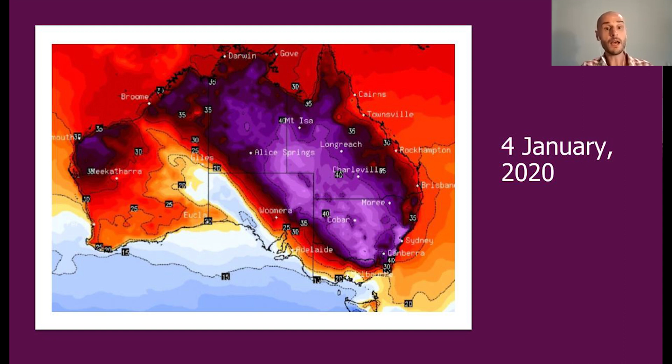There are so many different things that we can be doing around housing, but we know that improving the standard of our homes and having better energy performance in homes is just a win-win-win. There's so many good things about it. It means that our homes are healthier. It means that we're safer in those extreme weather events.

And I've just posted a picture of the height of summer in a heat wave, and Sandy's absolutely right in the introduction that winter is actually a time when we're in our homes a lot, and when homes aren't warm and aren't comfortable, there are actually massive health impacts of that. So it's not just one aspect of health, but it means that our homes are more comfortable.

It lowers our energy bills, often substantially, and it lowers greenhouse gas emissions as well by using less energy or changing the ways that we produce that energy. And that can reduce pressure on the grid at peak times, which perhaps is a less exciting thing for a lot of people around the country to notice, but it's actually a really crucial thing in how we build and maintain our infrastructure.

Tonight we'll be talking, and Graham will be getting more deeply into the question of 8-star homes and what that can look like and how we can actually do that. But it's worth just putting in context what that can mean. So NatHERS, the NatHERS ratings for homes is done according to different values across a lot of different regions and climate zones in Australia, and measures the energy loads that are required for heating and cooling in a given home.

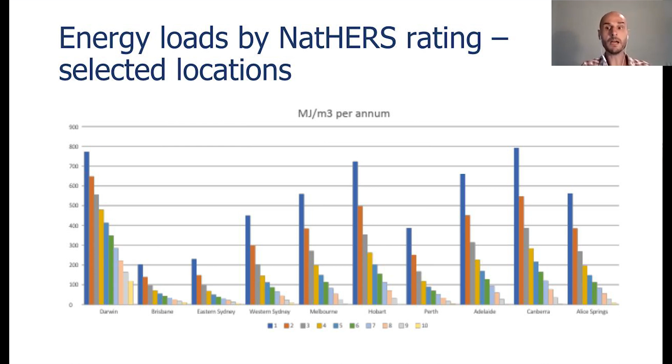You'll also notice here, I'm not sure how visible it is on the screen, but the difference between different ratings can be quite stark, but it's not just a 1-to-1 star rating. So the difference between 0 and 1 stars is not the same as the difference between 9 and 10 stars, just in pure energy terms. But when you're looking at an increase from 6 to 7 stars, which is a key increase that we're thinking about at the moment, that's in most places around about a 25% reduction in the energy required to heat and cool a home. So between 18 and 28%, depending on which part of the country you're in.

That saves money. If you're going from, again, let's say a 6 to 7 star home, you're actually potentially saving a substantial amount of money on your bills each year. This is some Renew modelling that was done in the context of Victorian medium-sized homes, and varies from place to place, but gives you a flavour of what that can be. Potentially several hundred dollars can be saved per year through thermal efficiency improvements, as do all electric homes.

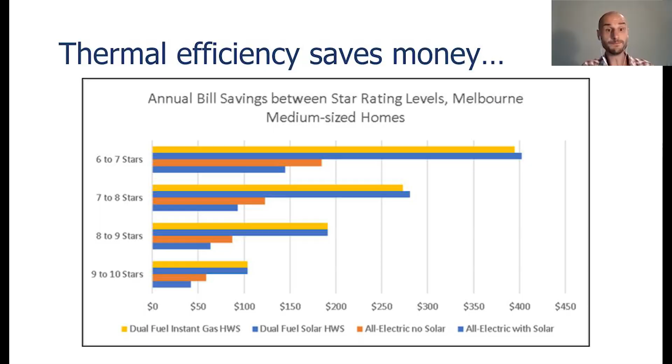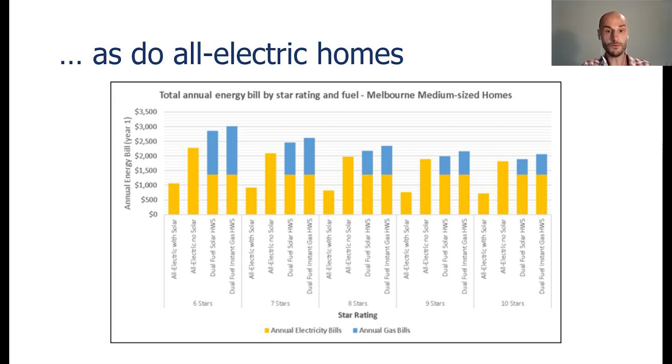Consistently, and this stands to reason, the homes with the lowest energy bills are going to be the homes with a high thermal efficiency rating that are all electric and have solar panels generating the energy that is used in that all electric home. So homes where you don't have to pay a gas connection, homes where you're not paying a gas bill, and where you're using relatively little energy that's generated from your rooftop, you're laughing. That's going to be the cheapest bills, and that goes across a wide range of areas.

The thing is, all of that is really, really clear that it is just a win-win-win. Improving the energy performance of your home makes sense under pretty much all conditions, but we know that public policy mechanisms are actually needed to make sure that that benefit is enjoyed by the majority of people in Australia. At the moment, about 10% of homes in Australia are built to a standard that's at least a star above the minimum standard.

That is to say, 90% of houses, I should say, and nearly 70% of apartments are just built to within a star of the bare minimum standard required by law. So the National Construction Code is the policy mechanism essentially that sets what that minimum standard is, and it's currently rated at 6 stars NatHERS, but that's updated every 3 years, and it's due for an update coming into effect in 2022.

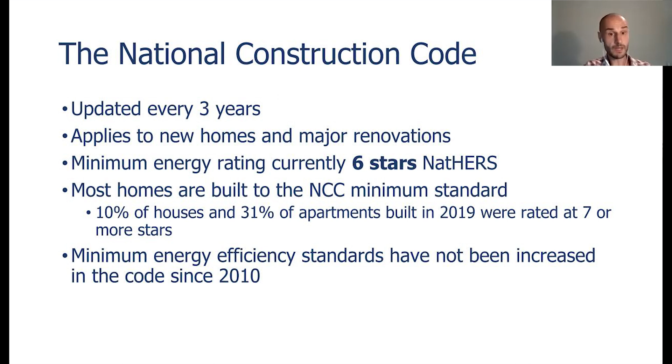The minimum standards for energy efficiency have only really been in place in various guises. We can get into the history, but essentially only in place for less than 20 years, and they haven't been upgraded from the 6-star standard in the code since 2010, which is just falling behind in the context of the climate emergency that we're in and the technical capacity that we've got to improve the standard of homes. That's just falling way behind what's needed and what's possible.

So the update of the National Construction Code is underway at the moment. Renew has been in a central leadership position of a community campaign that has been pushing for a long, long time for improvements in the code that will lift the minimum standard from 6 stars up well above 7 stars. And that's been a campaign that's been running for a number of years, that's brought together a coalition of over 60 community and tenancy and environmental groups to push for this sort of change.

And we have had some really big wins through that sort of pressure that's come from a lot of different places, including that campaign, but including people in the industry as well and other people who are supporting change. The government has given direction to the Australian Building Codes Board to develop a new draft code that will be released for public consultation pretty soon, over the next perhaps 3 months. And Renew is on the technical working group for this code development, which is the first time that a community consumer representative has been involved in this process.

So what can we expect to come out when this public consultation on the draft code comes about? There's a few things. There has been direction from the nation's energy ministers to the ABCB, Australian Building Codes Board, to develop draft code for 7-star ratings as a minimum, so going up from 6 to 7. That's definitely a significant step forward. We have pushed for a long time for it to be even higher than that. Our analysis has shown pretty consistently that there's value for money in raising it to at least 7.5 stars and up to 8 stars. But 7 stars is still a significant improvement on 6 stars, of course.

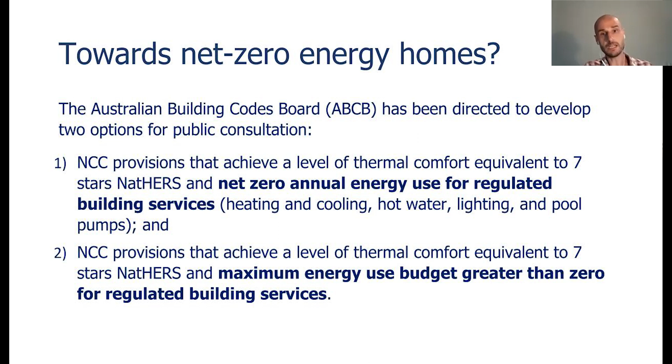That said, it is worth noting, particularly for people who are building their own home or trying to comply with this code, that if we are moving to a scenario of net zero annual energy use, you're always going to get better bang for your buck by building all electric homes that don't require a gas connection, where the energy that you're generating from the roof by the code is actually being used in your home. So that's going to be a really key issue in all of this process.

I'm pretty conscious of time, because the main part of tonight will be Graham talking through 8-star homes, but I would just like to say briefly what happens next. The public consultation is happening in mid-2021, so all of this will be public and open to look at over the next 2 or 3 months, perhaps May or June. After that consultation, it'll go back to the ministers of each state and territory and the Commonwealth, who will make final decisions, and those will be announced in early 2022. The code comes into effect in September 2022.

This isn't the only thing that we're pushing for when it comes to the Climate Resilient Homes campaign. Raising the new home standards up to seven or more stars is critical, and that's a really important response to making our homes climate resilient. But there's a bunch of other things as well, particularly that affect existing homes, which on average perform worse than the newer homes being built. That means we need to be investing in home retrofit programs. We need standards for renters. We need better, universal consumer information that anyone buying or leasing a home can access, energy ratings. We need a rapid transition to all electric homes powered by renewables.

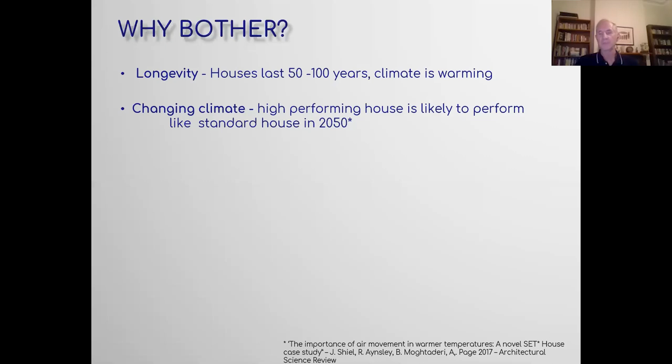There's been a study done, there's a reference there at the bottom, that showed that a high-performing house built at this time is likely to perform like a standard 5 or 6 star house by the time we get to 2050. So we need to make them as efficient as possible. Rob's covered the additional requirement of not just the thermal shell, but also the likelihood of being adopted in the National Construction Code, the requirement for the energy budget, and hopefully with the aim to achieve a net zero energy rating for new housing.

Some people say, well, does it really matter? Solar panels have become very cheap, very affordable and accessible. Can't I just put on more solar panels and that will cover my emissions? There are a few more things that sort of outweigh that. One is that a built form is hard to change. We can always add more solar panels, or in another 20 or 30 years, there may be a totally new technology that generates energy, and it may not be on our roof. We might have distributed grids, but we all know the cost of renovation. If we don't get the form and the thermal envelope of our houses correct now, it always costs a lot of money later, and it's difficult to retrofit, to add things like insulation.

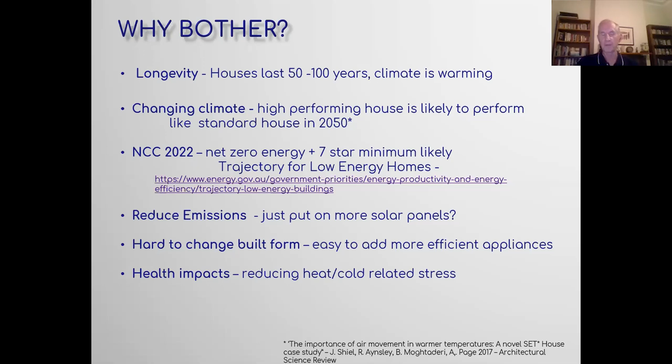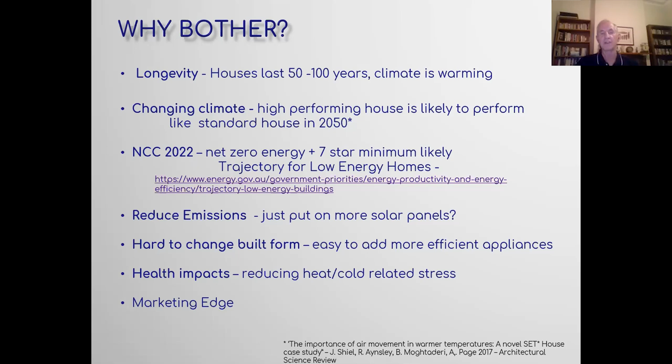As Sandy mentioned, health impacts from poor thermally performing buildings in this country are quite significant, and I'll discuss that a little bit further. For designers and builders who are listening, building and designing an energy efficient home can give you a marketing edge. People are aware of the high cost of energy over time, and they're keen to find better performing homes. Now, in terms of future climate, the NaTHERS tool works on an average climate file for different locations in Australia. I think there's 69 different climate zones.

We've already had a question earlier tonight about the climate data being out of date, and that is true. It is being updated, and hopefully it will be updated on a more regular basis. But CSIRO have developed a tool where you can go into this website and you can find out what your particular climate zone will be like in 20 years, 50 years, etc.

So for Sydney area, if you go onto that website, it'll tell you in 30 years, our climate here is going to be more like Byron Bay and perhaps more like Brisbane. Western Sydney is probably going to be more like inland Queensland. And so we can use that as a tool, when we model in NaTHERS, to see not only how the house might perform now, but how it might perform in the future.

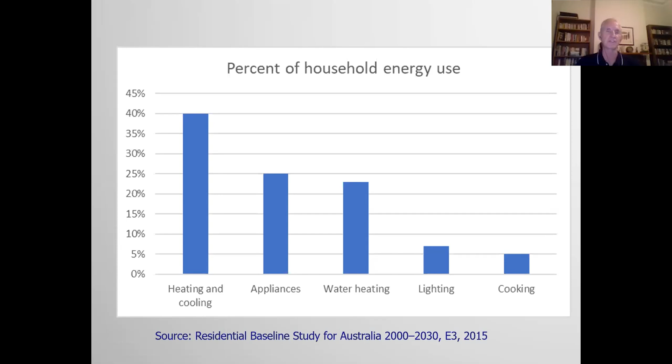So what does make an 8-star house? Good, sensible design. There's been a few questions I've noticed in the Q&A box about the extra cost of a 7 or an 8-star house. A lot of our existing houses could be easily raised from a 6 to a 7 or 8-star level just by doing better design. It doesn't mean we have to buy more expensive materials, though that helps, but we can do a lot just by getting the form of the building right, getting the window arrangement correct.

And so to design effectively, there's certain things we need to consider. The first one is the actual location, the particular climate, and the site in terms of, are you overshadowed? Where do the breezes come from? And that sort of micro data. The actual plan form can help a lot in terms of getting a good rating. An efficient shape means there's less interaction between the interior and the exterior. There's less surfaces where you can lose or gain heat.

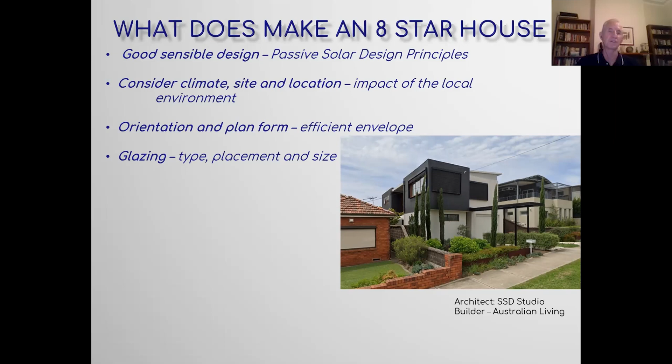The glazing is important. And this might be one area where you might need to spend a bit more money. But the issue is, in terms of spending a bit more money, it's the savings you make over that 50 to 100 year life frame of the building in terms of reduced energy consumption. Insulation is also important, and it's getting it to the optimum level. And working with your NaTHERS assessor is where you can optimize that.

Thermal mass can be important. Not in all climate zones. Tropical climates don't need it as much. And it's getting the right amount of thermal mass, not having too much, because then you're going to need a lot of extra energy to heat the home. And it's also placing it so it's not exposed to the sun when it doesn't need to be. Ventilation is important for cooling, as is shading. So we'll go through these in more detail, but also working with your NaTHERS assessor is important in terms of getting a good rating.

Unfortunately, a lot of the time, the assessor is brought in at the last minute just to provide certification and confirm we get to that minimum 6-star level. Assessors can do a lot more than that, and they can help you optimize and refine your design. So it is important that you get engaged with them. Even if you're a building client, not necessarily a designer or a builder, ask to speak to your assessor and talk to them about what they're going to do for you, and I'll provide more detail as to how you can engage with them closer.

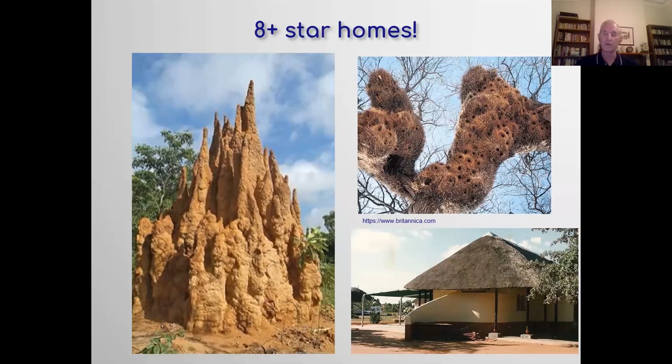This is a picture of a mass weaver's nest from South Africa, where the birds can create the ideal temperatures for their chicks to hatch in by building using natural materials and clustering them together, minimizing the exposure. And often traditional building methods and techniques can help inform what we should do in different particular climates.

We've also forgotten a lot about what good thermal design is. This is a plan Colonel Light developed for Adelaide, and it was laid out on very good solar design principles. Unfortunately, a lot of newer subdivisions are not laid out on this basis.

The trajectory for low energy homes, which has driven the requirement or the campaign to raise the thermal rating to 7 stars, looked at a whole lot of things, but it didn't look at precinct design, about subdivision design, about suburb design. It was stated early in the process that was out of scope.

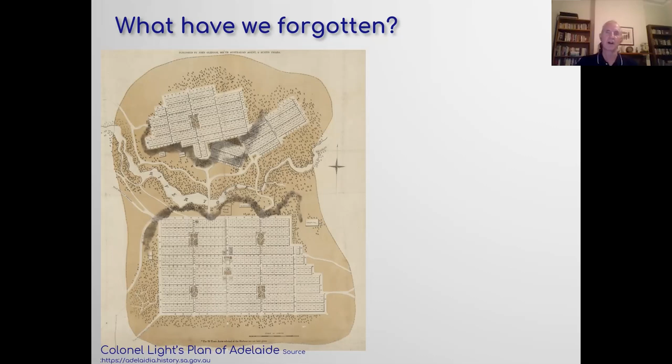I think the trajectory is meant to be an ongoing process so that we can keep evaluating how our housing is performing and, if necessary, again, raise the standards. I think we need to push heavily that in the next round of the trajectory, precinct and subdivision design is very important, because if we get that right, it's much easier to design thermally efficient homes.

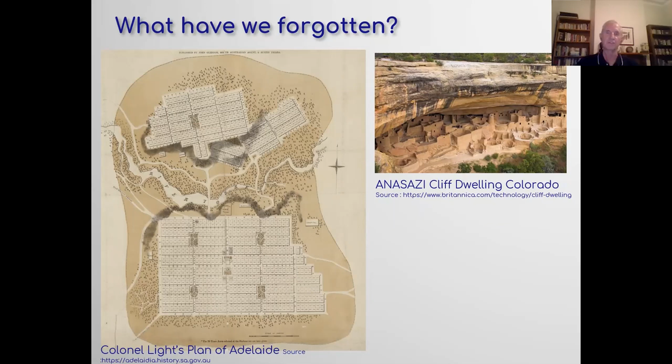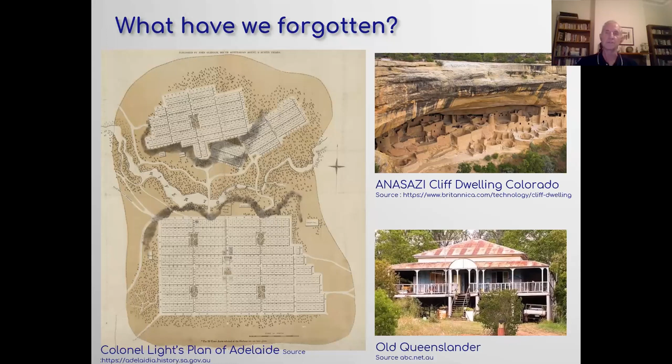It's not rocket science, this type of thing, and we as a species have known how to do it for a long time. Even the humble Queenslander was developed to work with the local climate because of the humidity, to allow for ventilation around. We seem to have forgotten in our suburban developments about verandas and other techniques to utilize natural ventilation. So just going through the principles we need to consider.

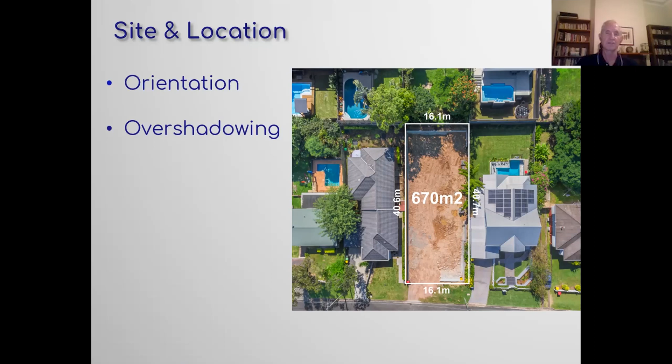Site and location is important, and the orientation of the site is very important. We need to try and optimize our orientation to the north. That can be difficult at times with our block arrangement. We may have a block that's facing east and west, and we may have to use some clever ideas in order to overcome that. Overshadowing from adjoining buildings, especially larger buildings or big trees, can impact on our solar performance.

The local climate obviously has an impact, and the strategies we use in the tropics will be totally different than strategies you'd use in, say, Tasmania. So the climate zone within the local NatHERS setting, but also what your local situation is, or what the microclimate is. If you're not familiar with that, maybe talk to older locals, they've been there a while. They can tell you a bit about the direction of prevalent winds and how hot it can really get in summers, etc.

The topography is also important in terms of keeping the cost of construction affordable, but also working with the slope of the land. And what is also becoming more important in rural areas, and also on the fringes of the cities, is designing for bushfire. And this should work hand in hand with your thermal envelope design. There are restrictions depending on your BAL, your bushfire rating, on what type of windows and how you seal your roofs and other details. So it's important that they can be considered at the same time.

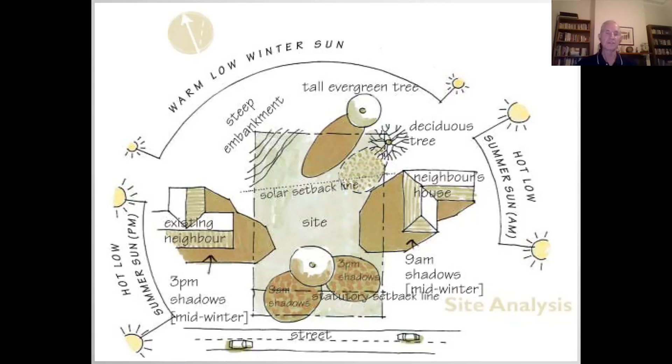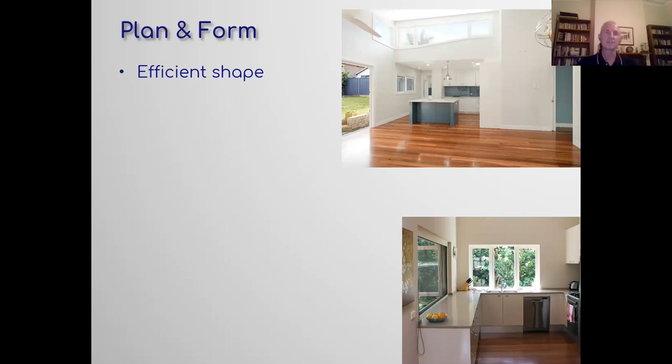This is just a typical site analysis diagram that architects would use at the beginning of a design process to consider all of these items. I did mention that plan and form is important, trying to keep the plan form as efficient as possible with minimal articulation. If you have a plan form that steps in and out and has lots of exposed walls, it's much harder to get an efficient rating.

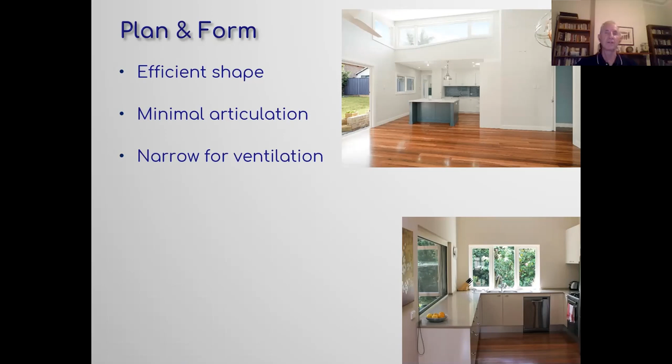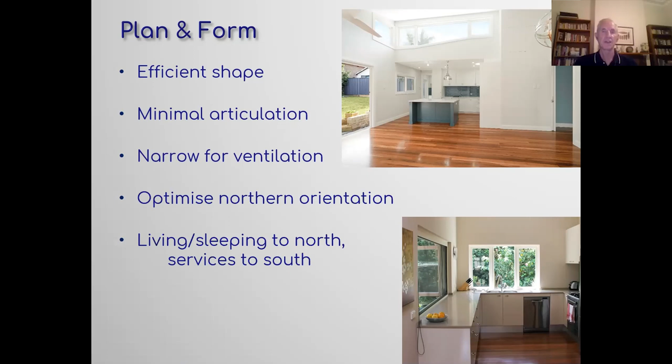You should try and keep the plan form narrow to allow for ease of cross ventilation through most of the rooms. You should try and optimize the northern orientation where possible, because with quite simple eaves and shading devices, if we can get most of our glazing facing north, we can optimize the amount of winter sun coming in, but easily exclude most of the summer sun. Our more habitable spaces should be on the northern side, and we can put services such as bathrooms, garages to the south or to the west.

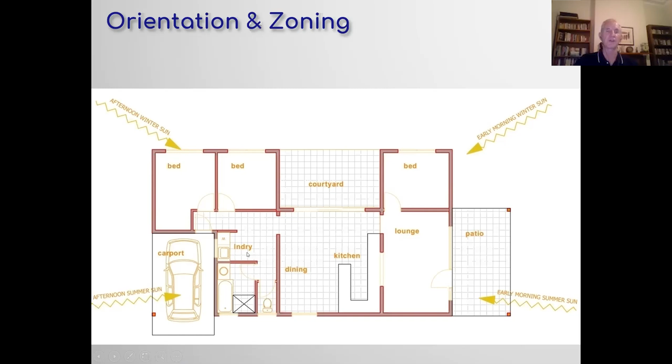But on the eastern side, we have a patio, which provides screening from the early morning summer sun. And on this side, we have a carport, which provides screening from the afternoon summer sun. And then we have services on this side as well, which aren't getting any direct sun and so not important.

So windows are quite crucial, especially in terms of getting a higher rating. They're the weak point in our building envelope. We can insulate our walls and floors, or if our floor is a concrete slab on ground, or our roofs, we can heavily insulate. But glass, it's difficult to insulate. So it will be the point where we lose most of our heat or gain most of our heat.

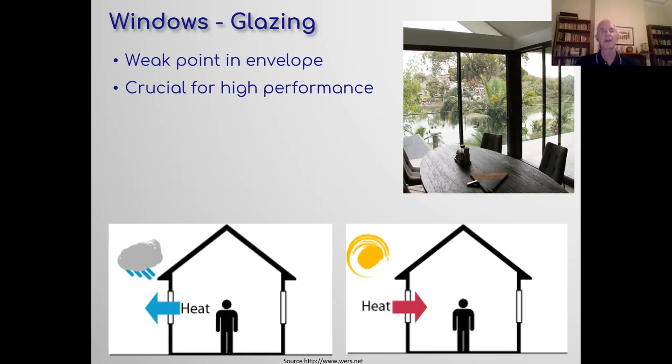There's a range of different glazing options. Low E is low emissivity. That reduces the amount of heat that's transmitted through the glass. So it can reduce heat coming in, which is good in summer. And it does also reduce heat flow out at night. It can be a cheaper option than having to go to double glazing, which is really the optimum.

The next value, the SHGC, is the solar heat gain coefficient. So it's a measure of, if the direct sunlight hits the glass and the window frame, how much of that heat is transmitted. There is a window rating scheme in Australia called the WERS rating scheme, and that will tell you the U value and the solar heat gain value for all the windows that have been rated.

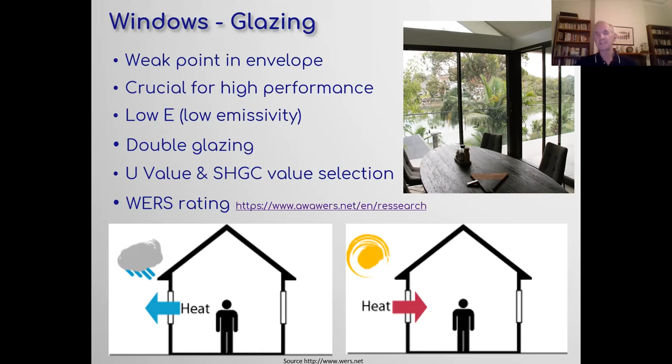It also gives you a value for the light transmittance, which is worth keeping in mind. Some of the special glasses that might have a low solar heat gain coefficient end up being tinted and cut down your natural light. So it's just something to be aware of. So that's talking about glass. The window frames themselves also affect the thermal performance of the windows overall.

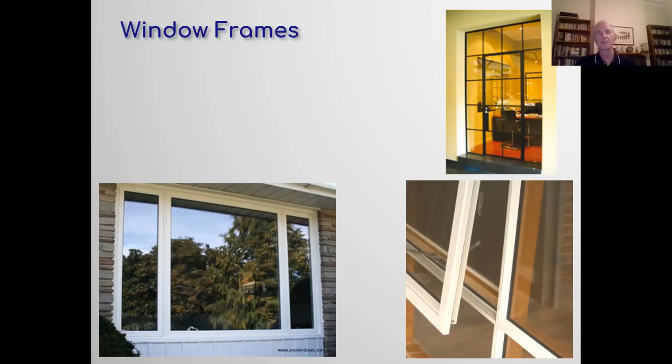Conventionally, we use aluminium. There's now available thermal break aluminium windows, which is basically the frame is split in two with an insulative isolator between the inner and outer frame, which slows down the heat transmittance. There's also steel windows, which are being used a bit more. Both of these products are metal, and metals are very good thermal conductors, so they are the lower performing of the different types of window frames.

Timber is an older style, more conventional frame. It has a low conductance, so thermally it's a good frame to use. There are the issues with the use of timber. Where is it sourced from? Is it sustainably sourced, FSC? It also needs more maintenance over the life of the building. It has to be resealed or painted. And that has an environmental impact as well as a cost.

There's also composite windows, and you can see the image down on the right-hand side. And this is a combination of an aluminium external frame and a timber internal frame. So you get the thermal benefit of the timber internally, and you get the maintenance longevity benefit of the aluminium externally. They do cost a bit more than your conventional aluminium windows, but there is a thermal benefit.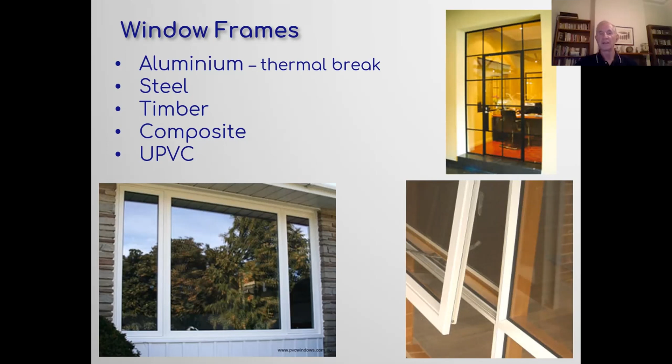So with these windows, such as UPVC, timber and composite, we get better performance in terms of lower U value, which means we get lower heat transmittance. So the rating of windows is important in the NaTHERS rating scheme. And historically, it has been problematic.

There has been a bit of a disconnect between the windows that are available within the NaTHERS software compared to what is available in the marketplace. And part of that is that the number and range of windows available is constantly changing. There's new glass products coming onto the market. Recently, improved procedures have been introduced, and the connection between the database in the software and what's available in the marketplace is getting closer and will improve more.

Within the software, there are default windows, which are just your average standard windows, but you have an option to use a custom window, which means you can go to the WERS website and select any window available and put that into your software, if that's the window you're going to use.

In terms of climate response, the solar heat gain coefficient is probably critical. U value is important, and obviously the lower the U value, the better in most climates. But with solar heat gain coefficient, obviously the strategy is a lot different in a colder climate than in a tropical climate. In a colder climate, you want to get as much of that solar heat gain as possible, so a higher value is better. In tropical climates, a lower value is better, as long as you don't lower the visible light transmission.

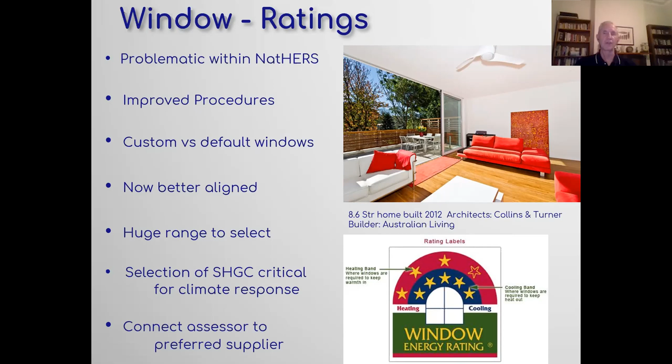One thing that can overcome some of the problems in terms of rating of windows and selecting the right product is if you know where you're getting your windows from. If there's a particular supplier you're using, let your NaTHERS assessor know which supplier you're using, and they can use those suppliers' windows in the rating to make sure you get as accurate a rating as possible.

As mentioned previously, shading is important. Your traditional eaves and verandas help to provide good shade, but they also provide outdoor living areas and a good connection to the outdoors. Pergolas are important. Operable shading is becoming more important as a result of climate change. We're getting more 35, 40-degree days in the shoulder seasons. Prior to the heat wave in January that Rob mentioned, the previous hottest day was back in November. And quite regularly now in Sydney in October, November, we're getting 30, 35 plus days.

Traditionally, an eave would have been designed for midsummer, for the summer solstice. But now we need to be able to pull out shading or pull down shading for those hot days when the eaves aren't big enough. If we make the eaves bigger to compensate for that, we then start to cut out our winter sun. So operable awnings, screens, external screens and blinds, also pergolas with deciduous plantings. There's a whole range of options.

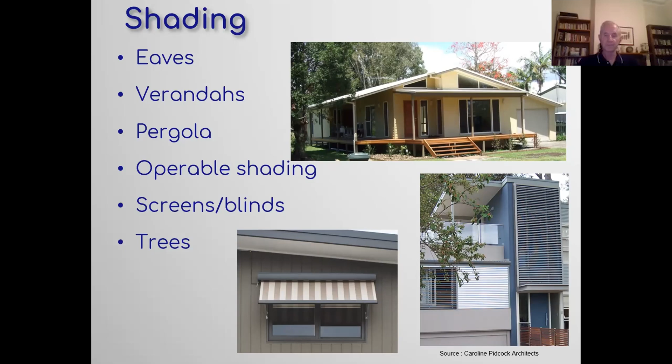Trees: planting trees in the long term and placing them properly. Evergreen trees can go well in a southeast or southwestern corner, and in the northeast, northwest, or to the north, ideally, we should be planting deciduous trees.

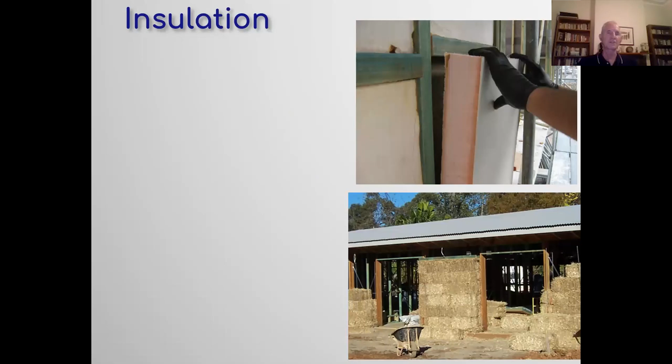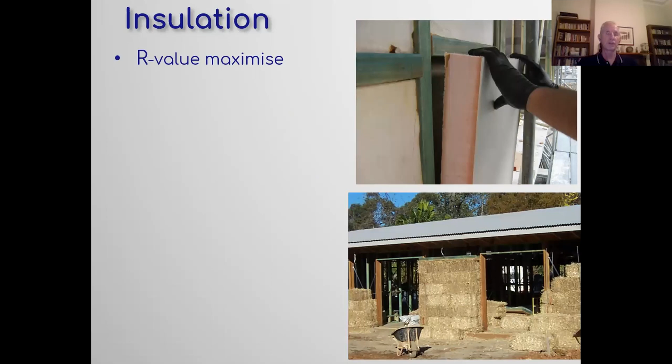Insulation is very important. There's a whole range of products, but the ideal is to maximize the R value. The form of construction can limit the amount of insulation that can go in. A conventional stud frame is only 90 mil thick. You can get an R2.5 high density batt, which will fit into that. Alternatively, you can go to, like shown in this top photograph, a foam product. That product is probably more like R3, R3.5 in the same depth. However, it's more expensive and it also is a foam product. So there's other environmental impacts in terms of using such products.

Reflective foil and air spaces have been used traditionally in the past. Not so popular now because there's concerns about condensation. It still can be useful in tropical climates to keep the heat out of roofs, but you need to be aware of the condensation risks and make sure that that's managed properly. Usually ventilation may help.

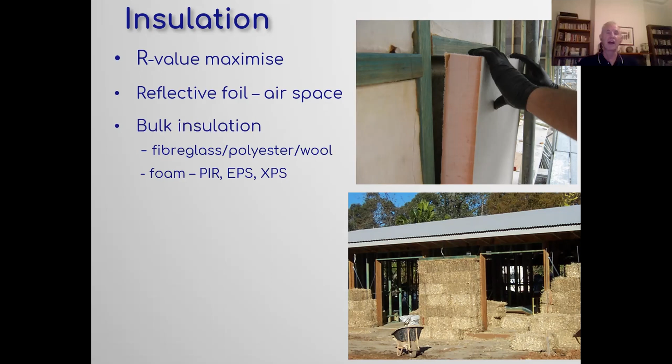So the different bulk insulations available are the typical batts, either fiberglass, polyester or wool. The foam options are PIR, polyisocyanurate, expanded polystyrene or extruded polystyrene. You can also use insulative materials such as straw bales, which is shown down on the bottom here, and AAC, which is autoclaved aerated concrete. Hebel is the trade name. It's like concrete that's been foamed and so has very fine air pockets in it.

Condensation risk is an issue with the use of insulation and the placement of insulation. We haven't got time to go into that, but be aware of it. We did have a talk, I think, at our branch 18 months ago. That video is online of a person from ProClima who make breathable membranes. It may be worth having a look at that.

The Australian Building Codes Board has produced a handbook on condensation risk, which is downloadable from their website, and that's a good reference. Thermal bridging is important in terms of getting a good thermal envelope. It's something that traditionally hasn't been modelled well within the NaTHERS framework. That's being looked at, and it's hoped with the update in 2022 that it will be better

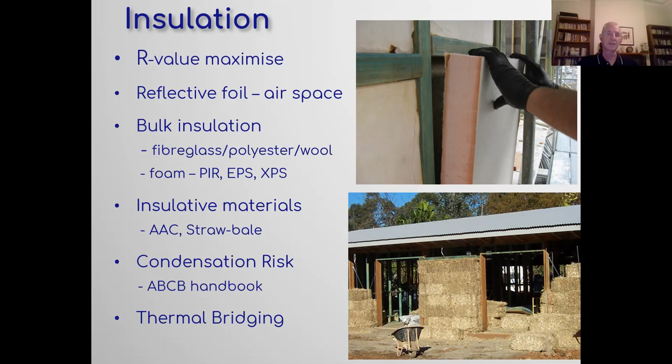Thermal mass is important, especially in temperate and cooler climates. It acts as a heat sink in both seasons, and it can help to stabilize internal temperatures. It works most effectively if it's insulated from the exterior. Traditionally, we've built brick veneer walls where we put all of our brick on the outside. It's much more sensible to put the brick on the inside and put the insulation on the outside.

The brick then will stay cooler, and as the interior warms up, the brick or your concrete slab will absorb heat out of the air and keep it cooler. Similarly, in winter, if we design our windows primarily along the north side, the sun will come in during the day and our slab and our walls will absorb that heat and re-radiate that heat at night.

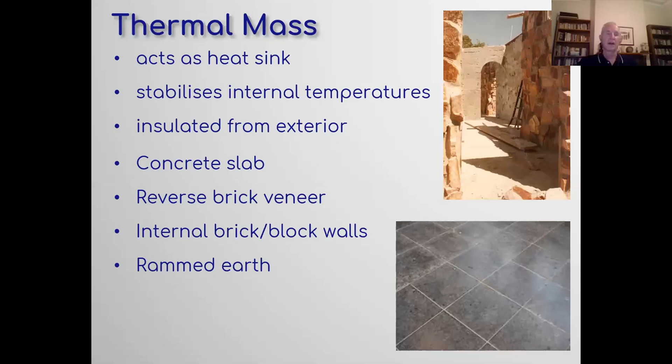So there's a range of different materials. Rammed earth is very good, but again, ideally, it needs to be insulated from the exterior. Mud brick is also very good thermal mass. It may be possible to do some external walls without insulation, perhaps say on the northern side, but to get a high rating with these type of natural materials, you will need to look at using some insulation in part of the external walls. Stone, although more expensive, although you may have found stone on your property, also is very good in terms of thermal mass.

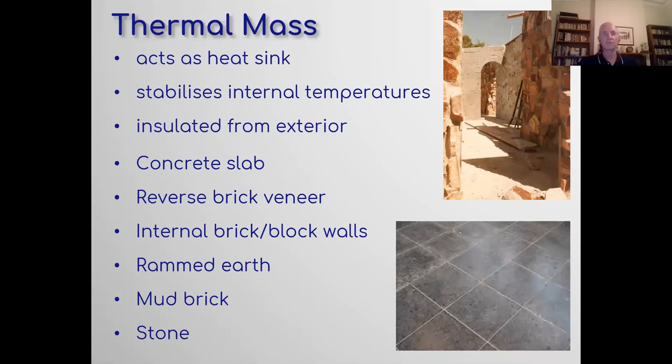Ventilation is important for cooling and removing heat, and it's a matter of placing windows in the right location to catch wind and create breeze paths through your rooms. Ideally, a room should have windows on two sides, opposite or adjacent sides, and it can be better, rather than having one big window, to have two small windows.

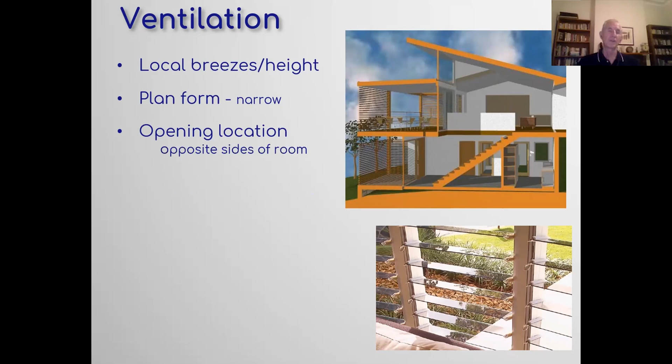Sometimes you might have a bedroom that's landlocked and only has one external wall. Rather than traditionally putting one large window in the middle of that wall, two smaller windows spaced apart can give you a bit of a breeze path as well. It will also give you better light distribution into the room. The type of window will affect the amount of ventilation. Casement type windows, which hinge from the side like a door, or louvre windows, provide the most ventilation for the opening.

Stack effect ventilation is very effective. If you can have high level windows, especially around a stairwell, the air within these rooms will tend to rise as it heats and collect at the top here. If we can open these high level windows, that hot air will escape, and you can pull cooler air from lower down, from shaded areas. And you'll get a natural draft effect occurring, especially at night.

There's a process called night purging, where if you can induce that sort of ventilation when the outside air is cooler than inside the house, then it enables your thermal mass, which has absorbed all that heat during the day, to cool down and be ready for the next day to start sucking up the heat again.

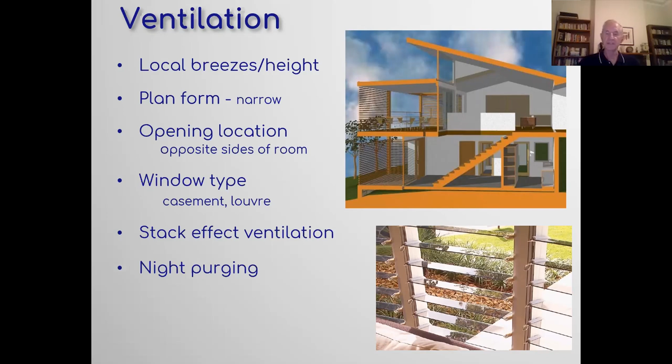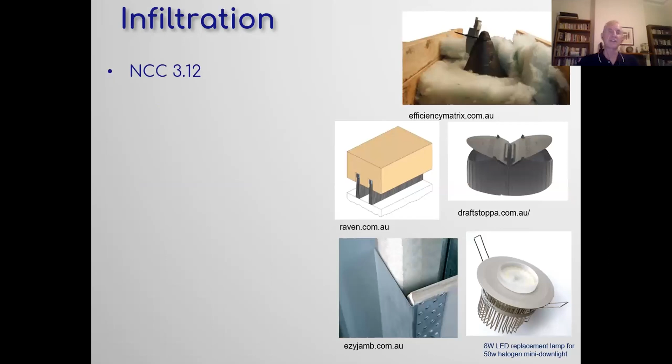Infiltration is important, and this is where all those gaps come in, which traditionally in Australia we've not been very good with. There's a section of the National Construction Code that covers this. It's not well understood. We should avoid ceiling penetrations and avoid using recessed downlights. If you do use downlights, you can put covers over them. If not, you have to keep the insulation away from the downlight, which creates a little chimney that the heat can get up through. There's other lighting options: pendant lights, track lights, spotlights.

You go to this effort to create a nice, tightly insulated envelope, and then we cut lots of holes in it to put in downlights, and it's sort of counterintuitive. Providing good seals around doors and windows is important. Exhaust fans, making sure that they're fitted with dampeners, so they can be sealed off when needed.

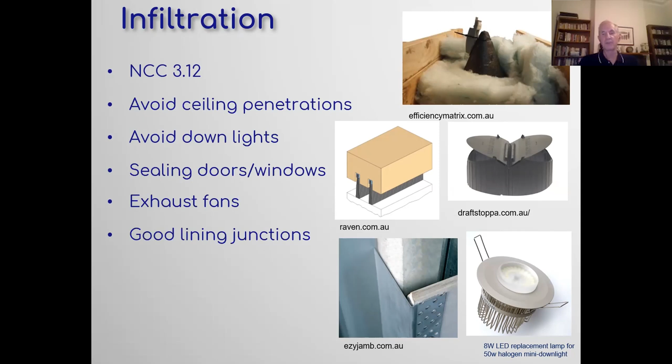Good lining junctions where our plasterboards and our skirtings and our wall, floor and ceiling junctions meet. Again, traditionally, we've tended to use skirtings and cornices just to hide gaps. We should be sealing those gaps before we fix our skirtings and architraves. And that is a requirement in the building code, but unfortunately, it's not well understood or followed through.

So talking about the actual thermal performance rating. If you want to know more about the NaTHERS process, you can go to the NaTHERS website. I recommend you use an accredited assessor. Unfortunately, there's only two states that require assessors to be accredited: New South Wales and the ACT. The other states have some sort of requirements, but it does mean in most states, anyone could do a rating. They've had no training. They're not subject to any scrutiny.

An accredited assessor, who will be a member of one of the accrediting organisations such as ABSA, HERA, or Design Matters, is required to have professional indemnity insurance. They are audited on a regular basis, and they're required to do CPD. So if you use an accredited assessor, you're assured of getting a decent result.

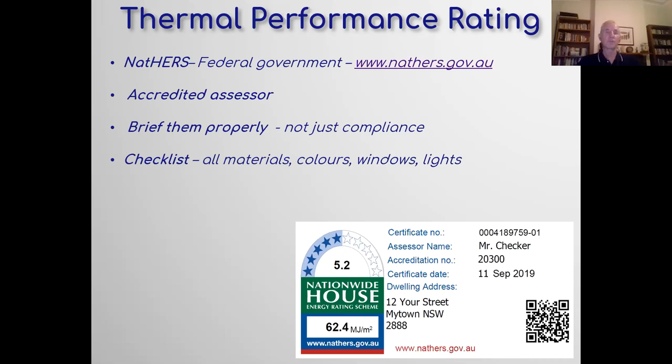In terms of the campaign that Renew is running, I think it's important to keep in mind that we should be pushing for a national accreditation of all NaTHERS assessors so that we can have consistent ratings right across the country. When you engage an assessor, brief them properly. If you want to go for an 8 or 9-star rating, let them know that early in the piece, and they will know that's what you're aiming for. Normally, they will give you a checklist with all the materials, colours, what type of windows, where you're putting lights. So you need to think about all those things before you get your rating.

However, you can engage the assessor early in the piece. Quite often, we're brought in late in the process when the design's already been locked down and there's little opportunity to influence how the design can be improved. Even if your designer has done a quick sketch, send it to your assessor and they can give you some feedback as to whether you've got the plan form right, the orientation right, whether there's too much glass. And that could save you a lot of time and heartache later.

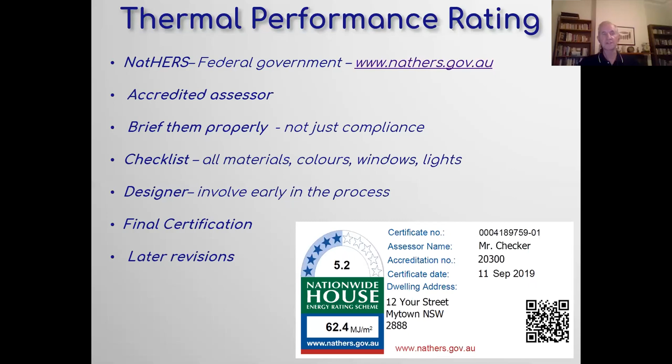Final certification is normally done, in New South Wales, at the DA stage. In other states, it's more at the construction stage. But there may be need for later revisions. You might have selected a particular type of window. When you get to actually build, that's not available or it's too expensive and you might need to go for a different type of window. So ask your assessor early in the piece what the process is and whether there's additional fees for doing a later revision.

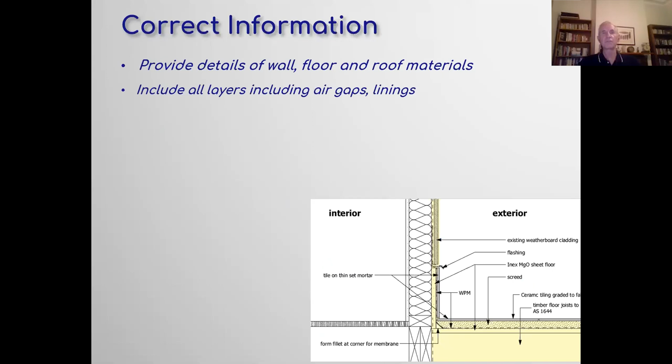They need to get correct information. They need details on what all the materials are, not just brick veneer. Are we using plasterboard inside? Are we using a breathable membrane or reflective foil? What colour are the walls? What colour is the roof? And your designer will be able to help you with this. It's helpful to get the survey information so they can model adjoining buildings and get the orientation correct. A window schedule is important so they can accurately model the windows, and floor finishes are important.

If you're relying on your concrete slab to provide thermal mass and then you cover it with carpet, you interfere with the thermal transfer of heat into that slab because the carpet is like an insulative layer. Similarly, if you place timber over a concrete slab. So it's important to consider floor finishes. As I've already mentioned, where exhaust fans are, whether they're sealed, how many downlights there are.

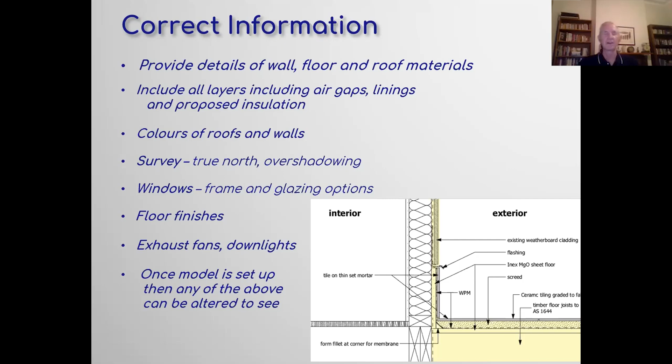Once the assessor sets up the model, then any of the above items can be easily changed. You can change your window from a casement window to a louver window to see if it makes that room cooler, or you can change it to double glazing, and I'll show you a bit more of this. So during the assessment, the assessor can generate feedback to you, which can give you a lot of information, which can help you refine and optimize your design.

So in terms of those questions about how much extra cost, if you go through a targeted design process, you can target where that cost is going, so you get the most bang for your buck. When going beyond compliance, I'll just quickly go through the rest. These are just some things to keep in mind.

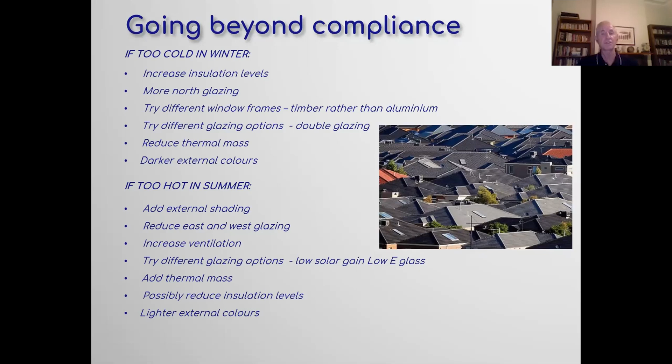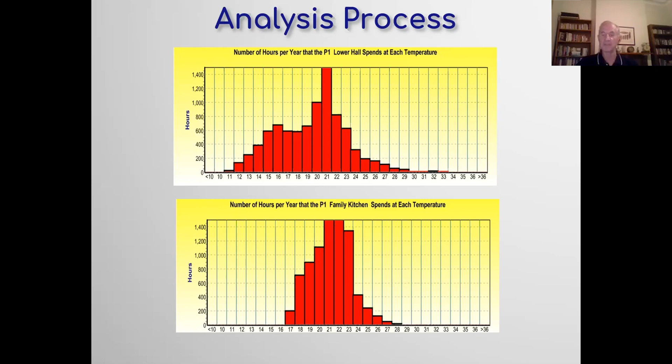The bottom chart shows what we should be trying to get for a 7 or 8 plus star house, where our temperature range is between 17 to 28, which is sort of the ideal. So then we have minimum heating and cooling requirements. I'll just quickly show you some examples of 8-star houses, and they're not a new phenomenon.

I started working nearly 12 years ago with a company, Australian Living, with Cameron Rosen. Cameron was on a mission to show that we should be building 8-star houses all the time. And he did a development in Rose Bay where the 4 houses shown here were all designed by different architects and all achieved an 8-star rating.

Similarly, the house below also achieved an 8+ rating; the architects were Collins and Turner. This house used UPVC doors and windows, which was quite unusual at that time.

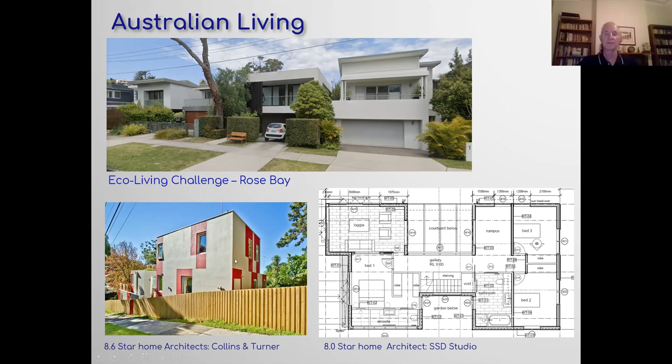We have done a lot of work with the Narara Eco Village just north of Sydney, near Gosford. We helped them develop their building standards, and they set, as part of their building standards, a 7-star minimum. There was a lot of debate within the village as to whether it should be 7.5 or 8 stars, but it was decided to keep it at 7 stars to try and make it affordable for people, but then encourage people to go beyond. And they've found that most people have gone beyond.

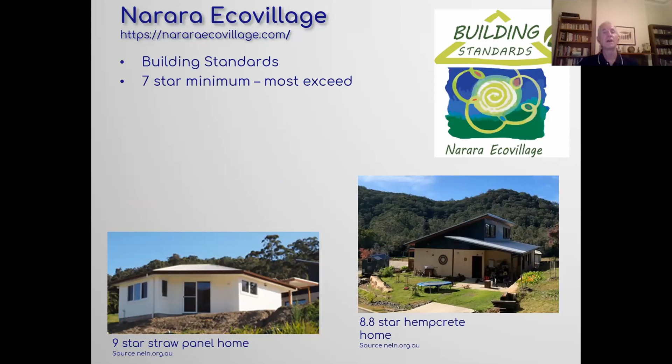There's also a requirement in the building standards to exceed the BASIX requirements in New South Wales for energy and water. Also, all houses are required to have a PV system, and within the village, there will be a mini grid. There's also requirements within the building standards to address health and amenity in terms of ventilation, access, choice of materials, etc. Waste is also covered, as well as material choices. And there's been many different solutions.

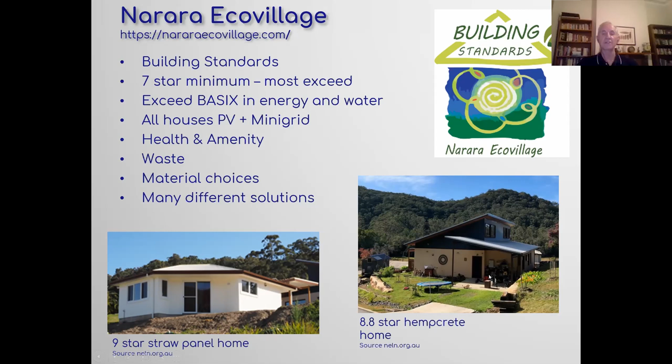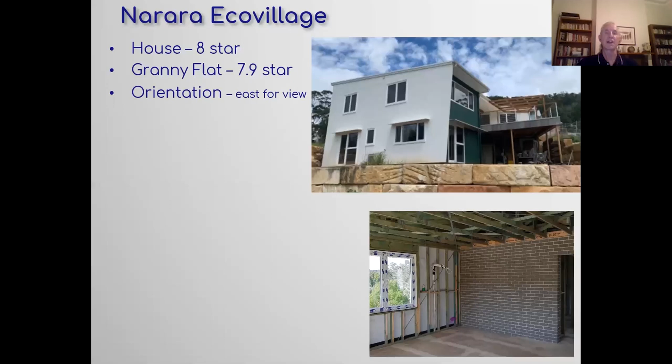Here is shown a 9-star straw panel home, quite a small, compact, affordable home. Next to it is an 8.8-star hempcrete home. This is a project we've been working on, which is actually 2 houses. It's a house and a granny flat on the same development, which both got close to an 8-star rating. There was a bit of a challenge with the site. The view was to the east, which is this large white wall on this side.

We used thermal mass with internal bricks, you can see in the photo at the bottom, as well as slab on ground in the lower levels, and internal brick veneer, as well as some reverse brick veneer walls. Insulation, we just went with conventional R2.5 batts, and R4 in the roof, so that's not excessive. And we've used breathable membranes for condensation control.

To optimize window performance, we went to UPVC double glazed. Most UPVC window suppliers will do double glazing as a standard, so you're not paying that much extra for it. In this instance, we've added additional shading with sun hoods. You can see here and here.

And there's a pergola and a veranda in this shared courtyard area. And we've also utilised colour. So east and west facing walls have light colour. North facing walls, we have a darker colour so that they'll absorb the winter sun. But in summer, these walls are shaded and don't get direct sun.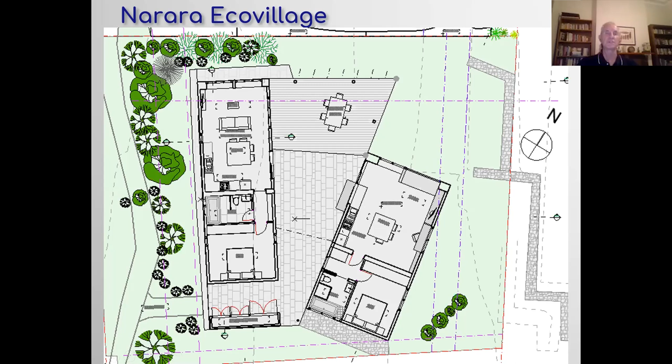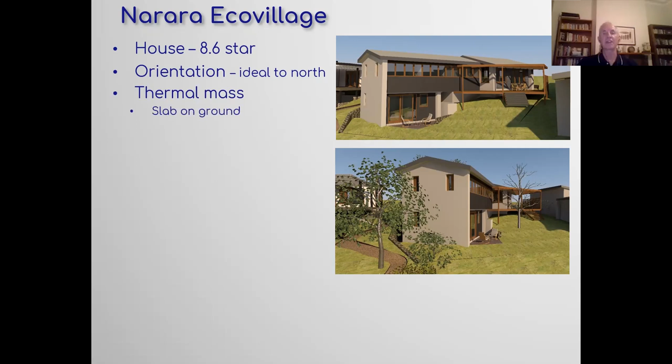This is another house which is currently under construction. This is an 8.6 star rating. This is a much better orientation. This is all north facing, so lots of good north facing glass. We've got thermal mass in the form of slab on ground on the lower levels. Some reverse brick walls to the east and west.

Internal soil brick walls to give more thermal mass, but there's some lightweight cladding in these instances. The insulation, again, is fairly conventional, R2.5 batts. We have used some straw panel walls, which give an R value of R4.1. This is a very good product coming from Viva Homes.

We have just recently completed another design where, using these panels, we're able to get to a 9-star rating, except we're still resolving with the client whether they want to go to that level. We may settle on an 8.7 star rating at this point in time and just see where they get to during construction in terms of final material choices.

So an R4 conventional batt in the roof, breathable membranes. In this instance, we've used composite windows and primarily single glazed. We've just targeted some double glazing where it was needed, where some of the rooms were a bit colder. We've got a pergola to the north for shading. We've got just conventional eaves. We've got a sun hood at this level. Nothing outstanding, but it gives us that control.

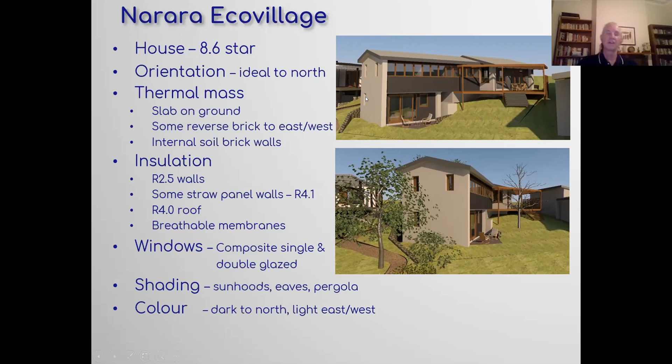For colour, again, we've gone with the concept of these north-facing walls are dark coloured and the east and west-facing walls are lighter coloured to reflect more of the heat. And that gives you an idea of the plan of the house, and north is in this direction.

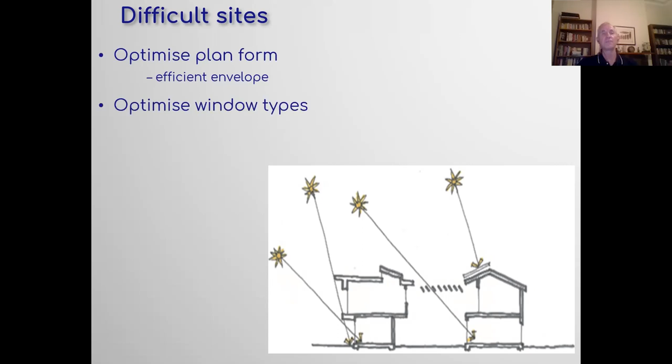Difficult sites, if you don't have great northern orientation, it's even more important to optimise the plan form and get an efficient envelope and optimise the window types. Again, you may need to pay a bit more for better performing windows. Creating sun traps, and this is an example of a courtyard that allows winter sun to come in to the rear. So north might be to the left, and you can still get good winter sun deep into the rear of the house.

Colour, again, as I've shown, can be useful, and a high performing envelope. One option to consider is to go for a thicker stud, maybe a 150 timber stud, and then you can use up to an R4 batt in your walls. And as mentioned previously, floor finishes can help in terms of getting the most out of your thermal mass.

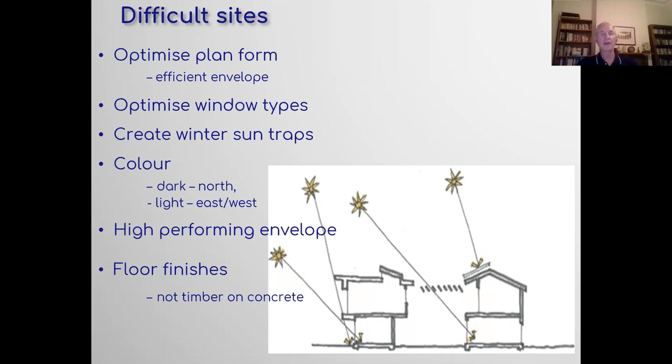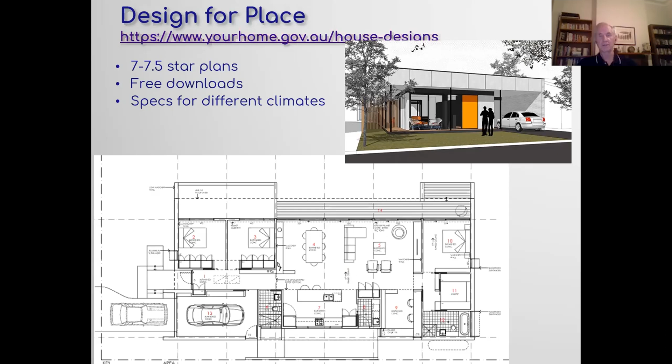I mentioned Your Home. Your Home has a program called Design for Place, where they've developed some typical designs at the 7 to 7.5 star level. And they've developed them for a whole range of different climate zones around Australia. They're available free for download. And with that, you can get a specification which will tell you what insulation and what type of glazing you would need for different climates. And it's a very useful program.

And this is from Renew, an example from Sanctuary magazine of a house design that has taken one of the Design for Place typical designs and just tweaked it a bit to suit the location, and then they've investigated different options to get up to an 8.2 star rating.

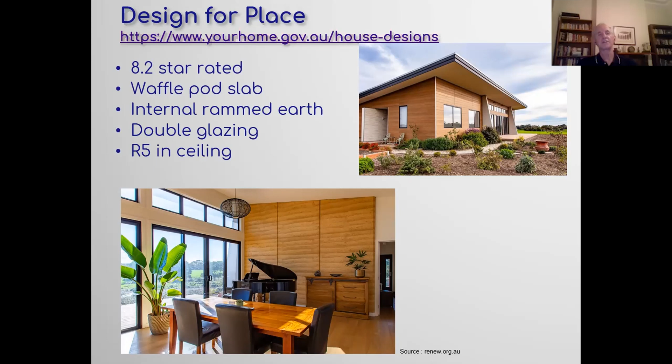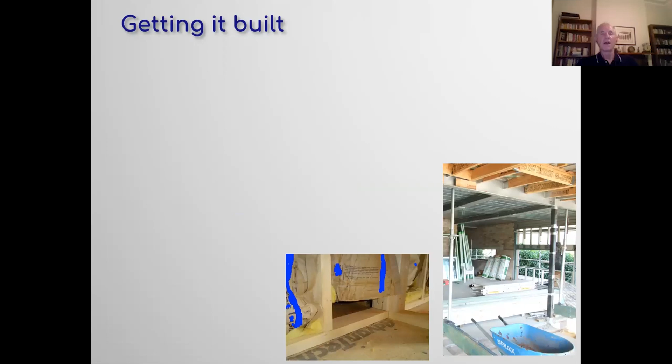We can do a rating, but can we make sure that it actually gets built to the rating? One thing to do when you get your NatHERS certificate is to make sure it's included in the building contract, so the builder knows he's got to meet the requirements of that certificate. Also ensure that the plans clearly specify the insulation, window performance values, and the other materials noted in that certificate, and ensure that joints are properly sealed.

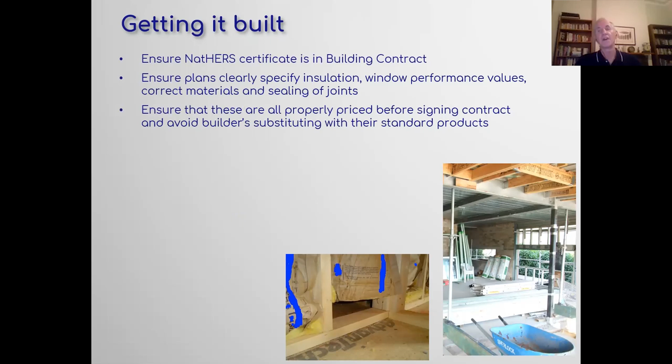And ensure that all of these items are properly priced before signing the contract, and avoid the builder substituting with, let's say, a lower standard. Ask the builder whether he uses a specialist insulation installer. Often, people on a job may not know how to properly install insulation. And you can see here's an example, this photo at the bottom, huge gaps left.

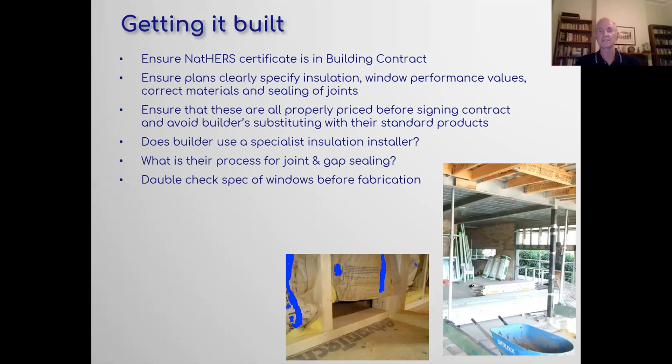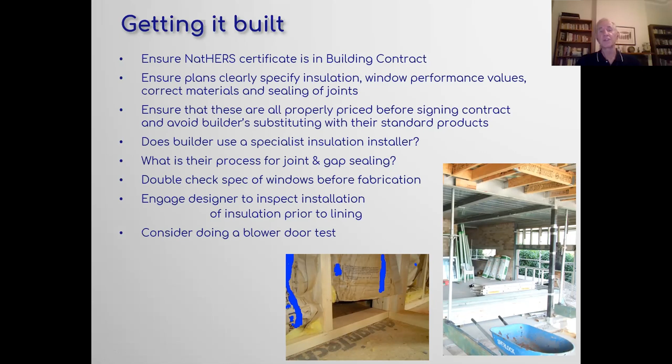Double check the specification of windows before they're fabricated, and make sure you're going to get the right U value and SHGC value that's been nominated on your NatHERS certificate. Make sure someone, and preferably your designer, inspects the insulation when it's installed or prior to being lined, to avoid this sort of issue down here. Consider doing a blower door test to check the air tightness of your building.

Renew, as you're probably aware, runs Sustainable House Day. I think we're likely to provide a link where you can actually look at the videos from the houses from last year, and you'll find quite a few examples of high-performing houses in there. And you're probably aware that Renew publishes both Sanctuary and Renew magazines, and you'll see regular articles that cover this.